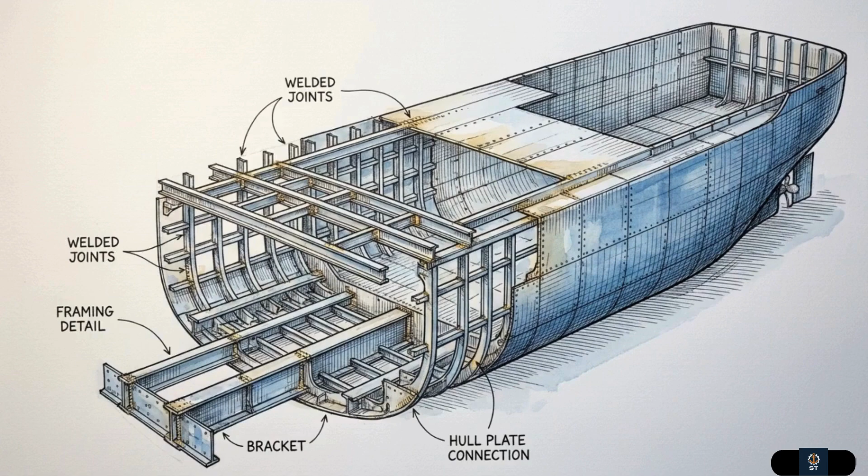The International Maritime Organization has set a strict target to counter this: net zero emissions from international shipping by or around 2050. That deadline sounds comfortably distant, but the heavy cargo ships being ordered and built in shipyards today will still be sailing in 2050. The window to slowly adapt to this regulation is already closed.

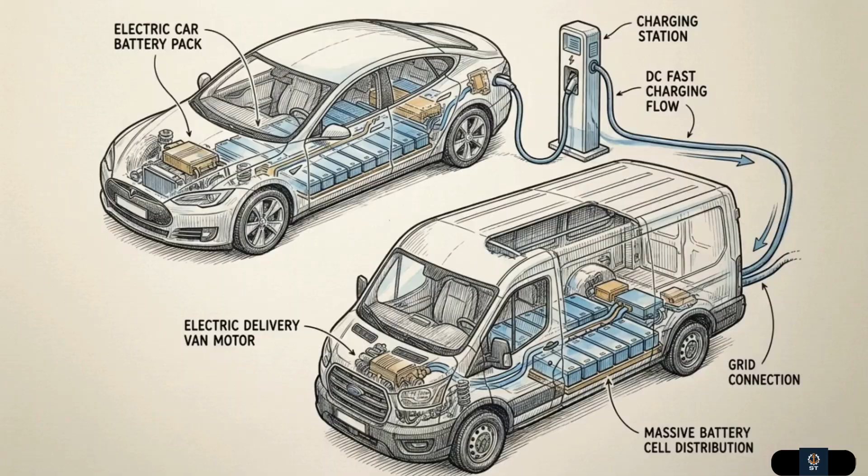For cars and local delivery trucks, the answer is electrification, so it is entirely reasonable to ask why we don't simply put batteries into cargo ships and sail them on electric motors. The answer comes down to what maritime engineers call the energy density problem.

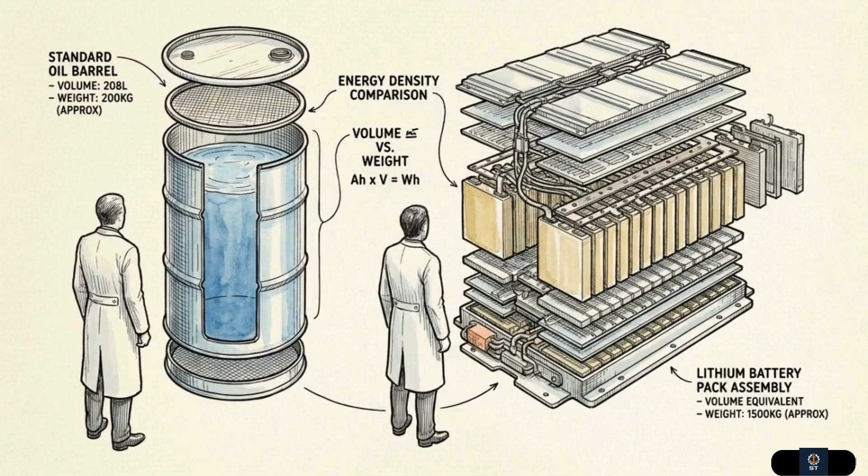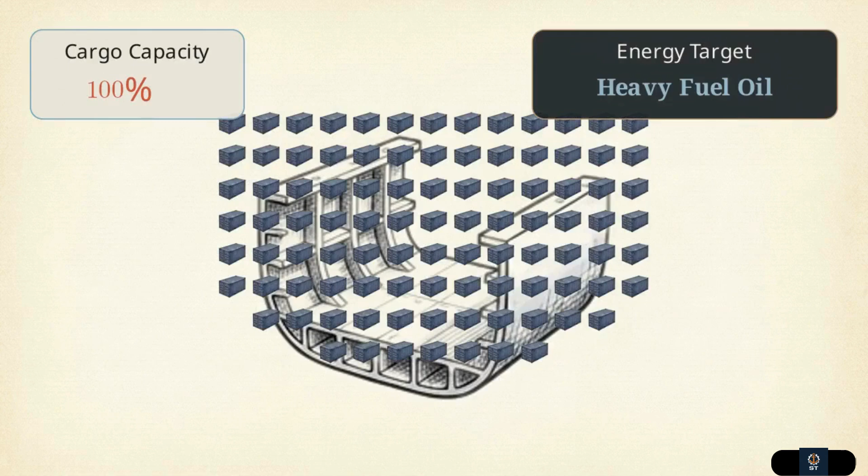The energy stored in a single ton of heavy fuel oil is staggering. This cross-section shows the physical limitation. To match the power of fuel oil with current battery technology, you would need a mass of lithium cells so enormous it would consume the ship's entire cargo capacity. A vessel carrying only its own batteries is useless for global trade.

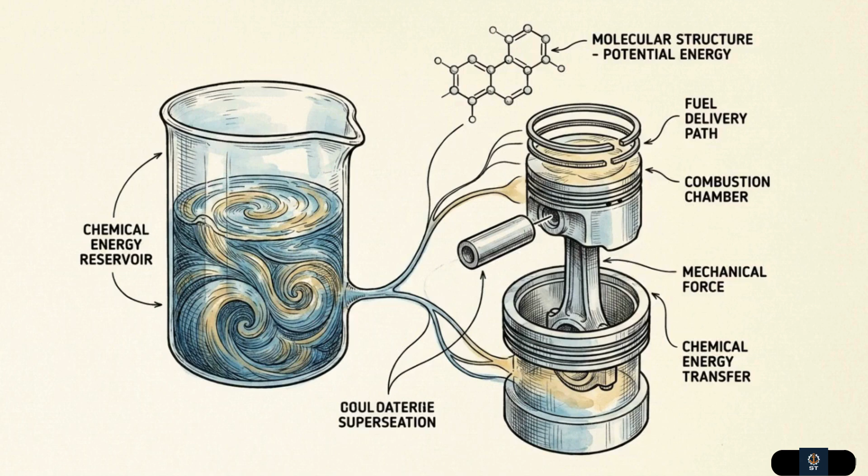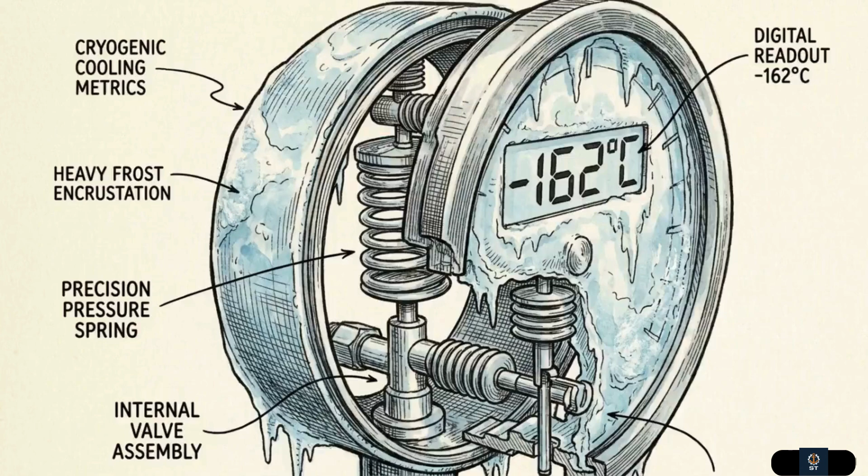The industry has to find a chemical alternative that packs the intense power of oil without the carbon emissions. The first serious alternative adopted at scale was liquefied natural gas, or LNG, cooled to minus 162 degrees Celsius so it can be stored compactly on board.

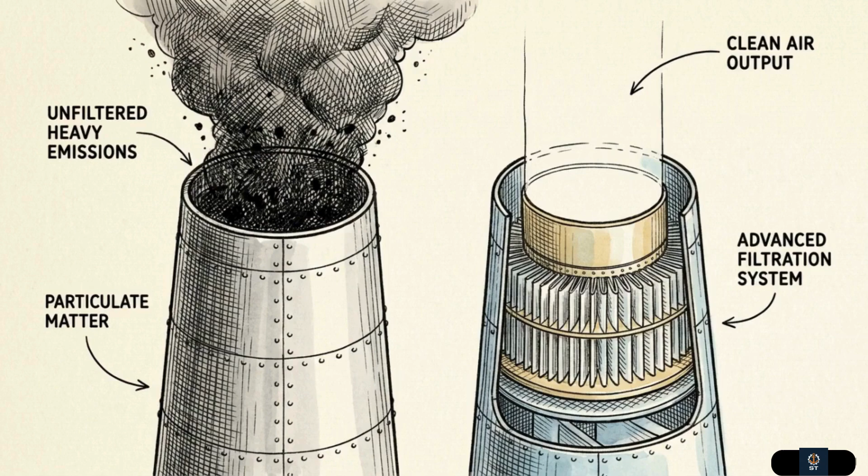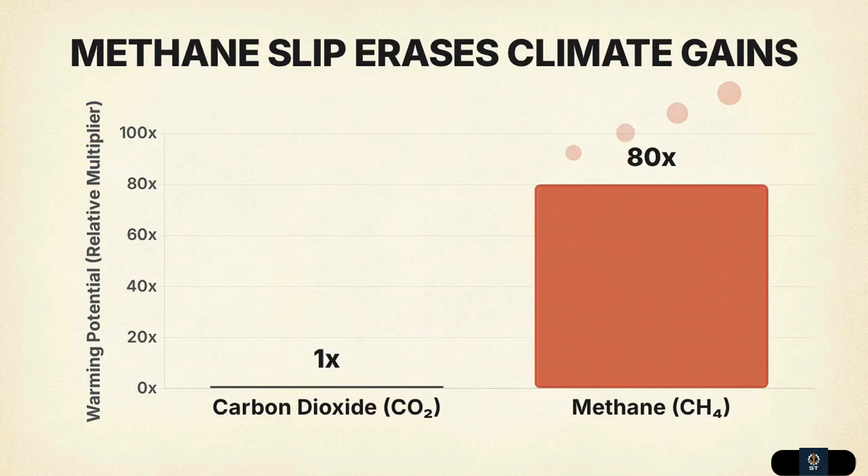LNG burns significantly cleaner than oil and eliminates sulfur emissions entirely. But natural gas is primarily methane. When engines inevitably leak small amounts of uncombusted methane, a greenhouse gas roughly 80 times more potent than CO2, the climate benefits quickly evaporate. This brings us to the near-zero candidates, starting with green methanol.

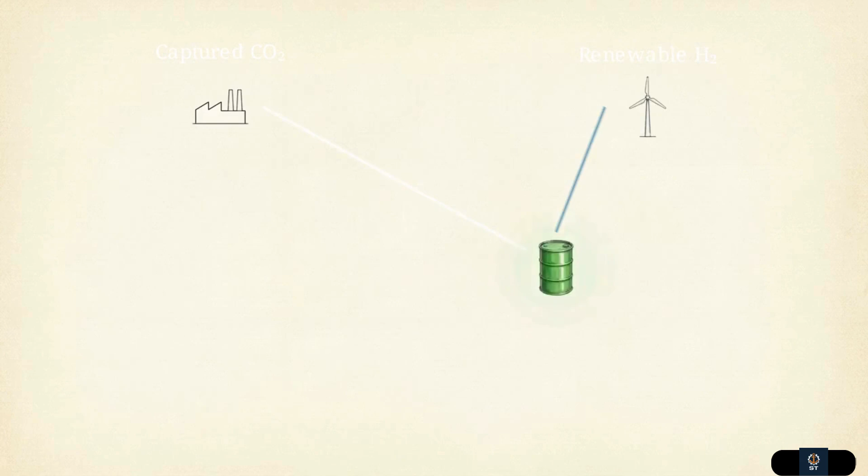Major operators are already putting methanol-fueled container ships on the water. This flowchart illustrates how green methanol creates a closed loop. By combining renewable hydrogen with carbon dioxide captured directly from the atmosphere, the CO2 released when the ship burns the fuel is exactly the same CO2 that was taken out to make it.

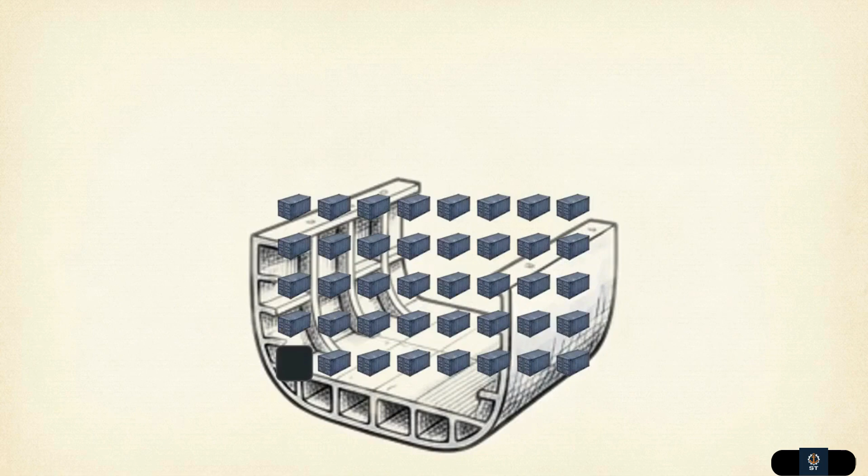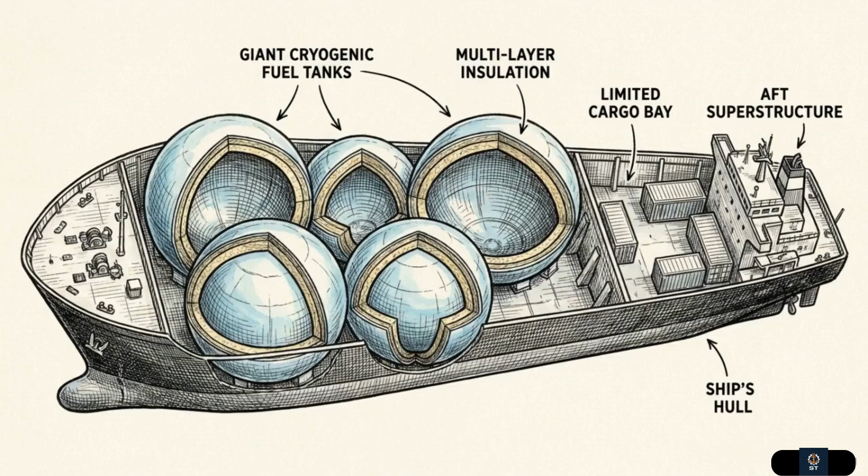But methanol holds less energy than diesel. To make the exact same transoceanic voyage, ship designers must expand the fuel tanks, cutting directly into the space reserved for paying cargo. LNG solves local air pollution, but leaks potent methane, while methanol forces operators into a zero-sum game between carrying enough fuel to cross an ocean and carrying enough cargo to make a profit.

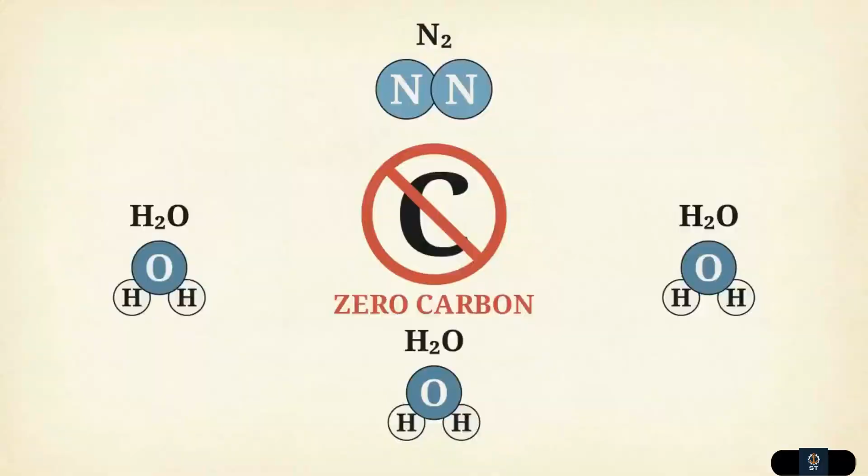To eliminate carbon from the exhaust entirely, we have to look at ammonia. Because the ammonia molecule contains zero carbon, burning it exhausts only nitrogen and water. But ammonia is difficult to ignite, and it is highly toxic. A leak reaching just 300 parts per million in a busy port or a sealed engine room would be lethal to the crew.

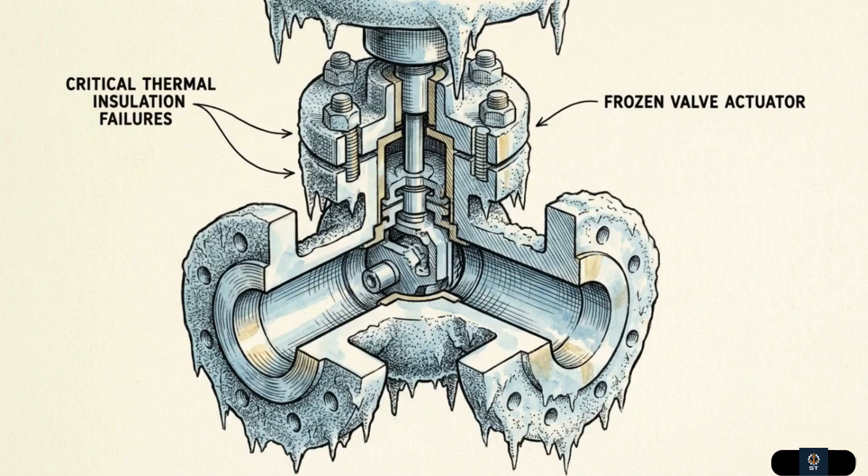Beyond ammonia lies liquid hydrogen. Fed into a fuel cell, it generates heavy propulsion while exhausting nothing but pure water vapor into the sky. Yet hydrogen presents the ultimate logistical hurdle. It must be stored cryogenically at minus 253 degrees Celsius. It is so exceptionally light that storing enough for a deep-sea voyage would require tanks larger than the hull itself.

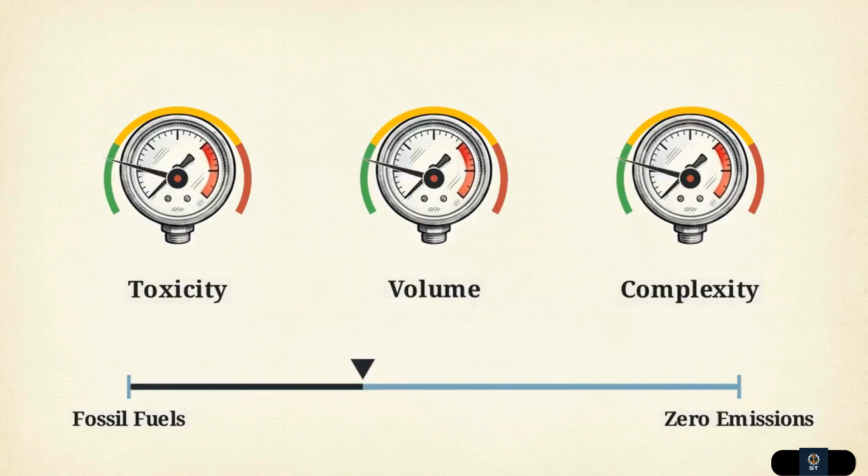The chemistry of marine propulsion presents a brutal trade-off. The closer a fuel gets to zero emissions, the more toxic, voluminous, and difficult it becomes to handle in the physical world. Because no single chemical fuel is perfect, engineers are supplementing modern engines by returning to maritime history's oldest power source, the wind.

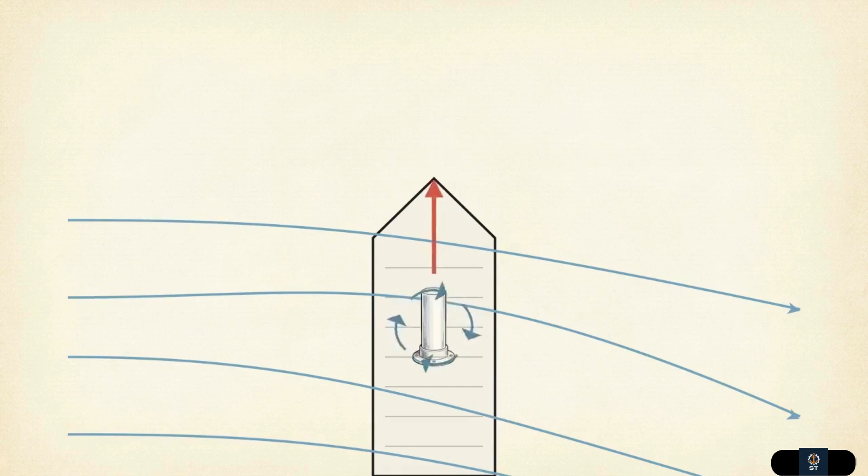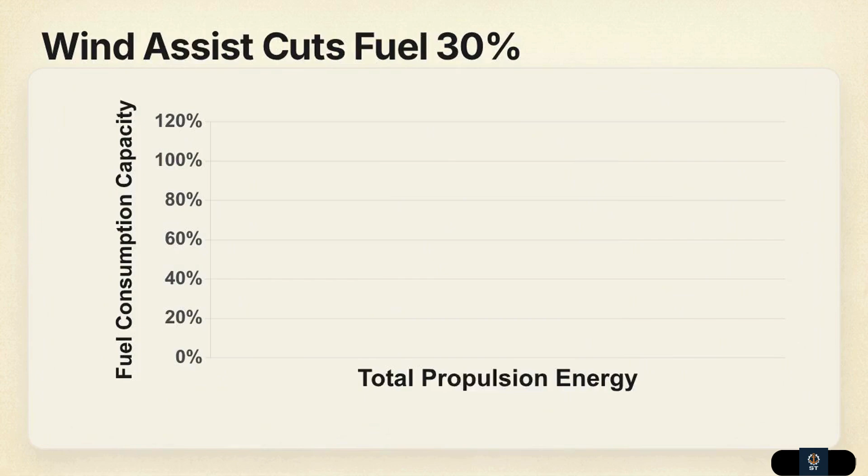This overhead schematic shows how a Flettner rotor works. As the wind hits the spinning cylinder, it exploits the Magnus effect to generate a forward force that literally pulls the steel ship through the water. These hybrid technologies do not replace the diesel engine, but by harvesting free aerodynamic thrust, they can immediately slash a vessel's fuel consumption by up to 30%, buying the industry time while the chemistry scales up.

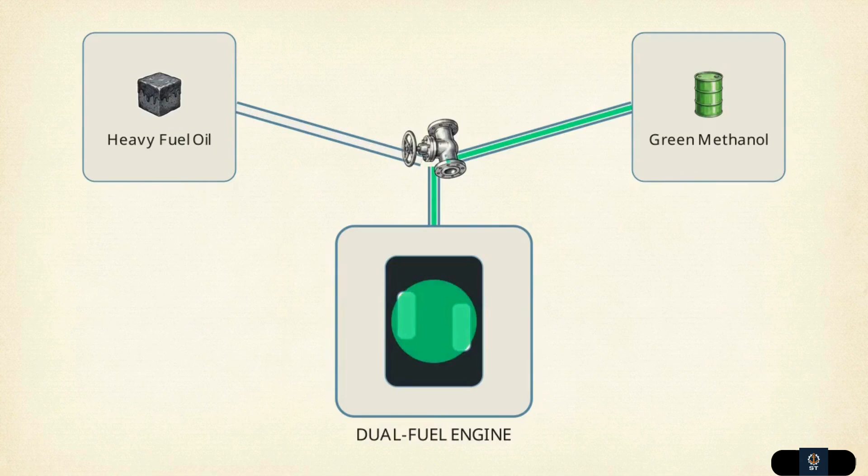All of these overlapping technologies converge here. Shipyards are laying the keels for the vessels right now that must survive in a 2050 world that does not fully exist yet. To survive this transition, operators are installing complex dual-fuel engines. These allow a ship to run on an alternative fuel when the green infrastructure is available and switch back to conventional oil when it isn't.

But beneath the steel and the emission targets, this transition relies on an invisible human workforce, managing these experimental systems in the middle of the ocean. A mechanic who has spent decades working with heavy fuel oil must now be rapidly retrained to safely manage cryogenic liquids and highly toxic gases.

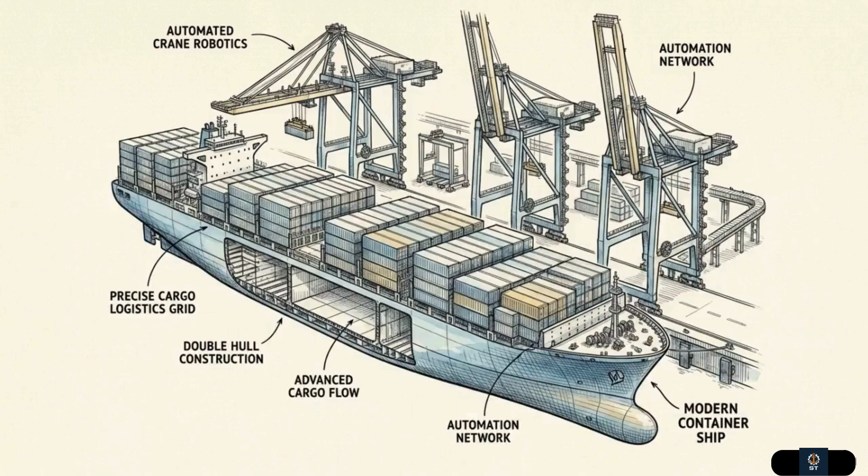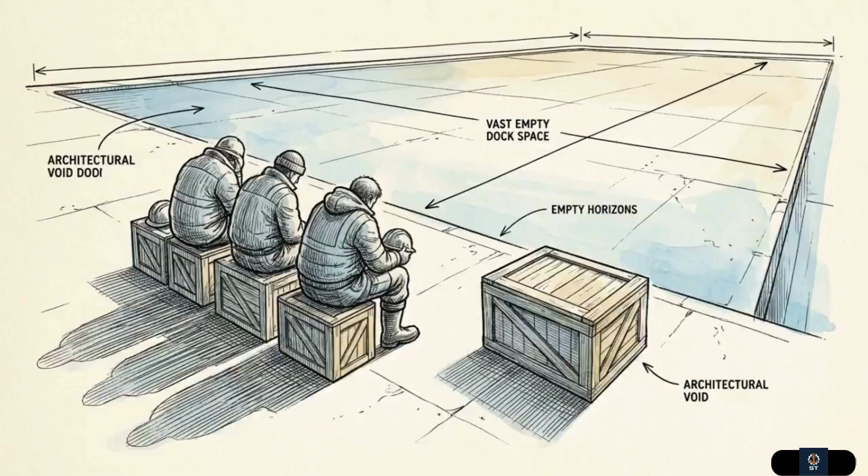Massive shipping conglomerates have the capital to invest in these advanced fleets and specialized training, but smaller operators in developing nations, running older ships on thin margins, risk being priced out of global trade entirely. Reaching net zero emissions means little if the transition breaks the human workforce operating the systems or severs the global trade routes that developing economies rely on.

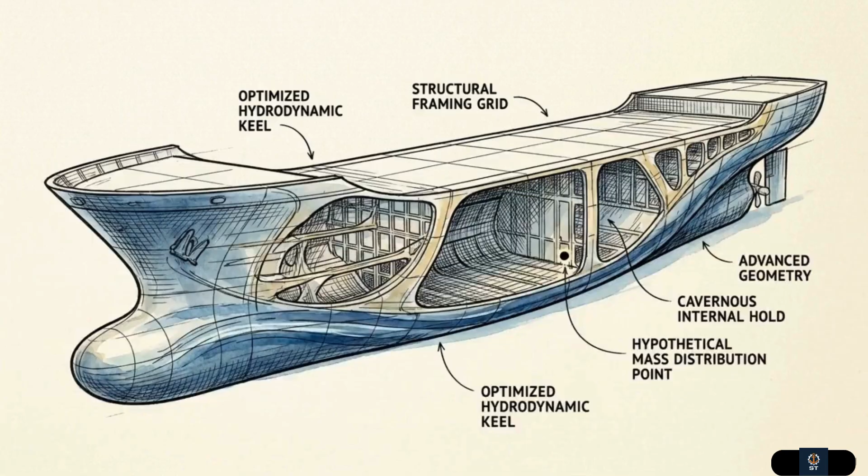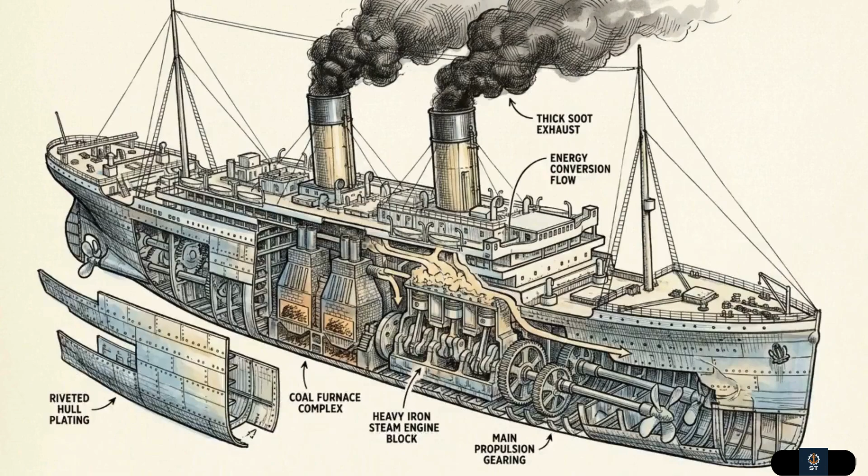The perfect vessel that will carry the world's cargo in 2050 has not yet been built. It will likely be a hybrid, harvesting the wind with mechanical rotors, burning zero-carbon chemistry, and maintained by a crew of specialized chemical handlers. We have been building ocean-going vessels for 5,000 years, from timber to iron and sail to steam. But the engineering decisions made in this specific decade will dictate the shape of the global fleet for the rest of the century. The blueprints being finalized in design offices right now lock in the carbon footprint of global trade for the next 30 years.